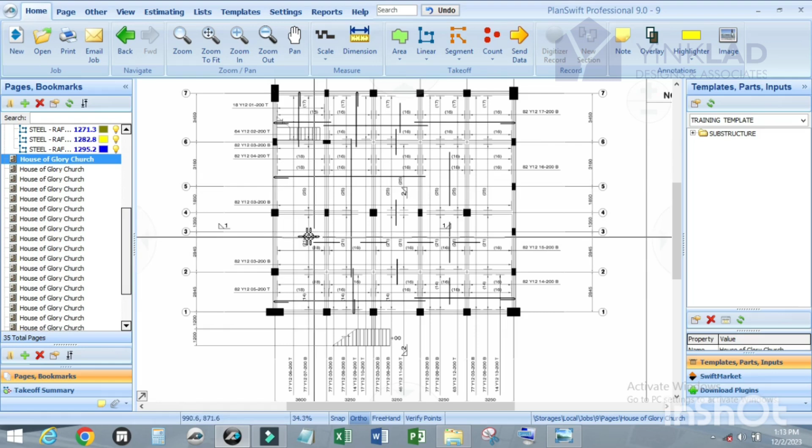Let me show you the section of this. This is ground floor slab details according to this structural drawing, and this is the section. We have full mats at the top, both vertical and horizontal reinforcement bar, and at the bottom you have full reinforcement bar with laps. As you can see, you have laps at the top of the raft beam.

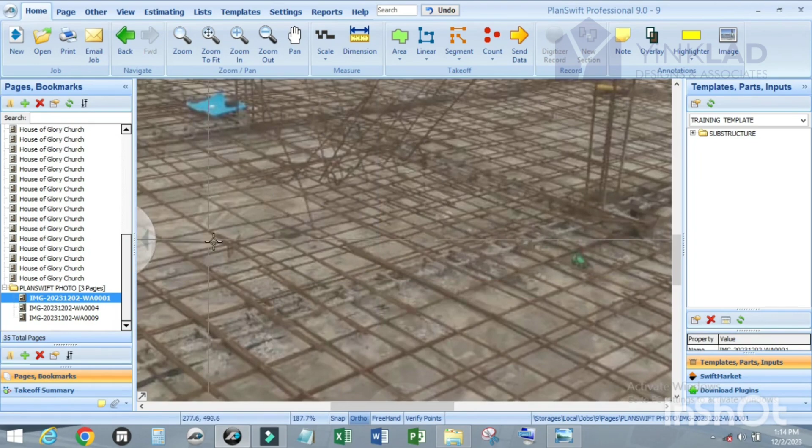So let me show you some pictures. This is raft slab, this is the top. I don't know, maybe you can see it clearly. This is the top reinforcement bar, horizontal and vertical, and this is hose bar.

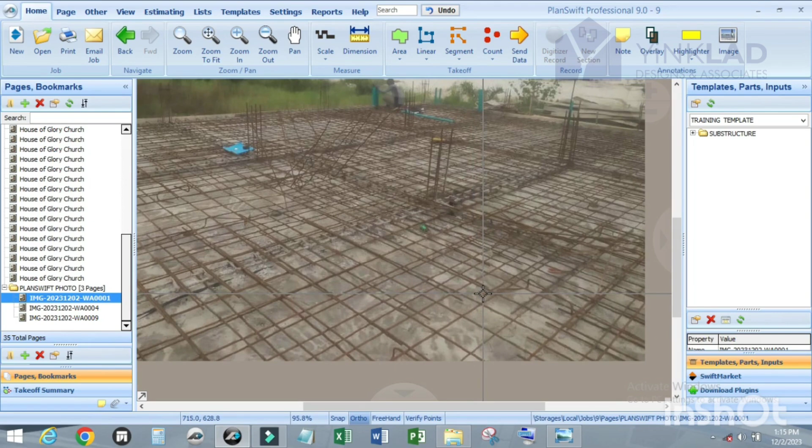The function of this hose bar is to raise the top bar up so that when casting, or when workers are working and moving on the reinforcement bar, it won't press it down. It will maintain a stable position so that the top bar won't press down and break the plumbing or electrical work, so it won't have any effects on anything placed under the reinforcement bar. That is the function of this hose bar.

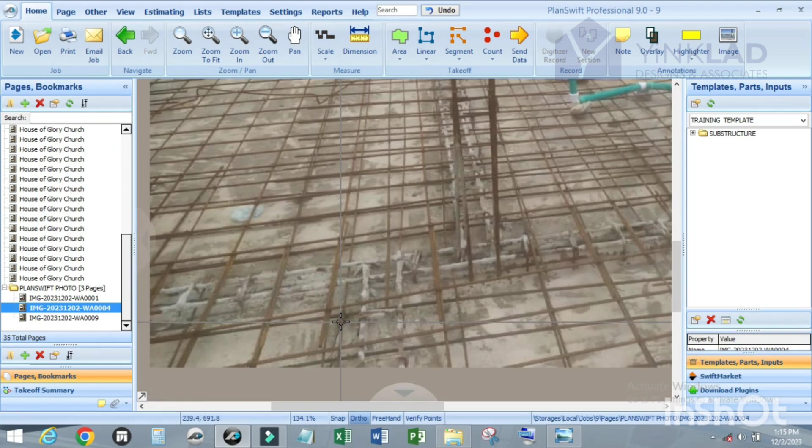We have top and bottom bar. I want to show you something. This is the bottom bar, the one under this reinforcement on top of the raft beam is the bottom bar, and this one that is on the beam is the top bar, and this is the laps. You have laps at both sides.

Same thing applicable to this one. This is the bottom bar, on top of the concrete, and the top bar is on top of the beam. Let me show you another picture.

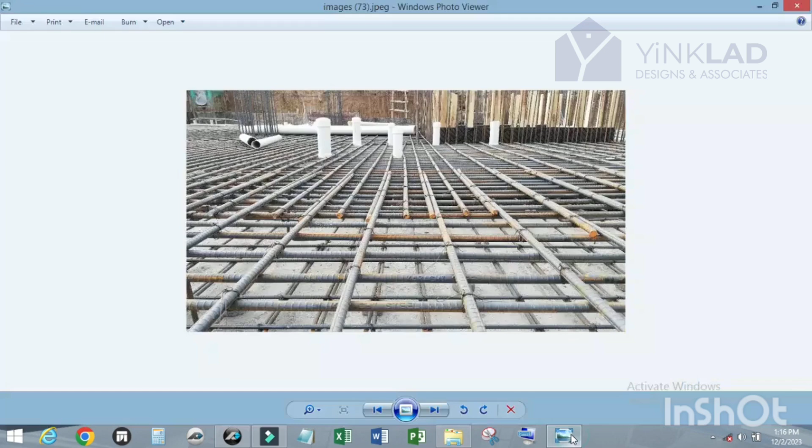This is the reinforcement, and I want to show you the laps. You have two laps, at both sides. So you have reinforcement at the top.

According to this picture, we call this one top, and the one under it we call top bottom. Understand, top bottom. And the one under that, directly on the concrete, we call bottom, that is BB. And the one on top of the bottom bar, we call bottom top, that is BT.

I haven't scaled this page. Oh my god. Let me scale it so that it makes our work fast. I'm very sorry because I haven't scaled it. Let me scale it fast.

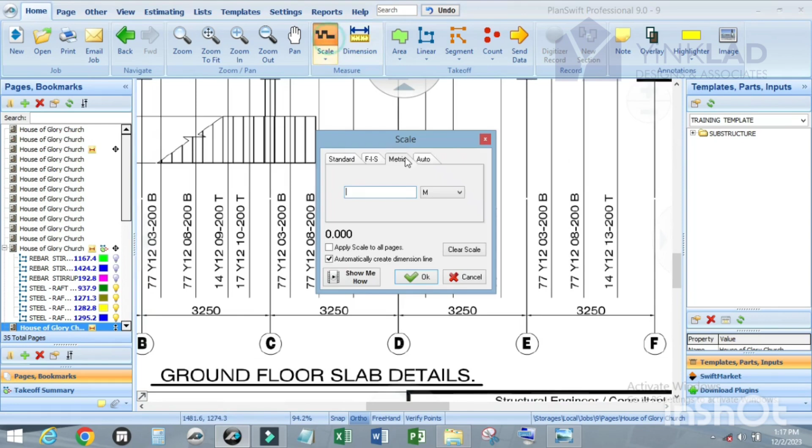Let me confirm it. Okay, yeah, it's correct, it's okay. So good, so let us start with the templates.

Let me first explain some things before we start customizing the templates. This tutorial is based on two aspects: the first one is counting takeoff with counting takeoff tools, and I'm going to make use of the count method and linear method for takeoff.

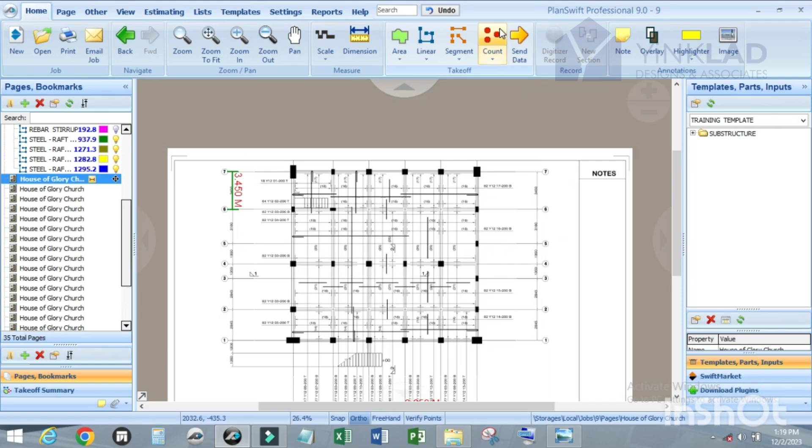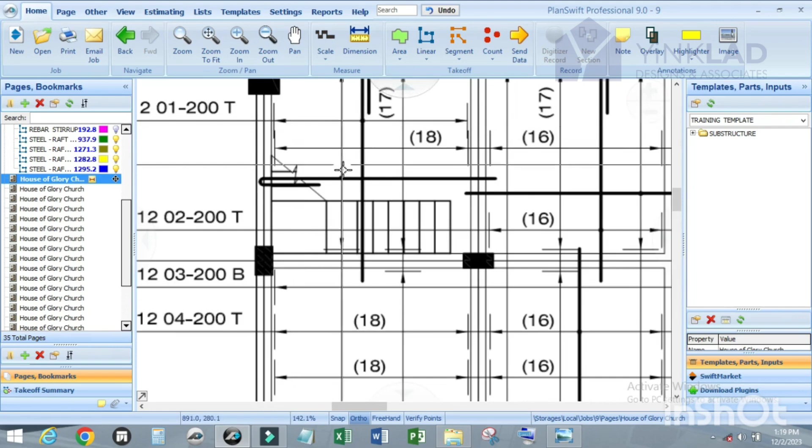So let me explain this. This is T, which means top, it means top bar. It runs like this. Anywhere you see this call out, this dimension from this point to this point, and you see these dots on the reinforcement bar, that means you have to trace this call out to this side or vertically, to determine the details of the drawing.

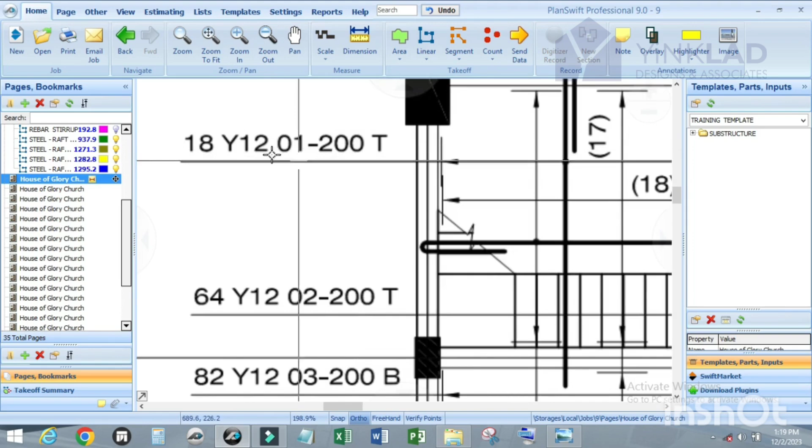So this is 18 numbers of Y12, bar mark 01, and the center to center is 200 mm. Now this reinforcement starts from this point and ends here, as in how it is being distributed, and the reinforcement bar runs from here to this side and bends like this, and bends like this.

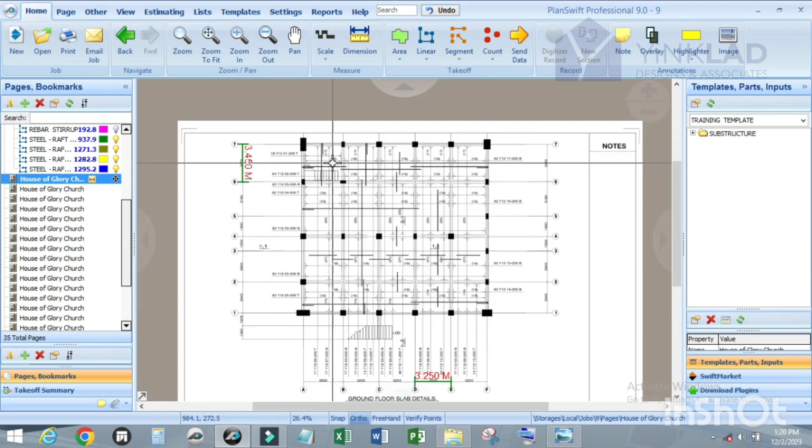Okay, let me now sketch something. This is raft slab, right? So for raft slab, this is how the reinforcement is being placed, something like this. It turns upside down. That is how raft foundation slab is being positioned, is being placed, and now place it like this.

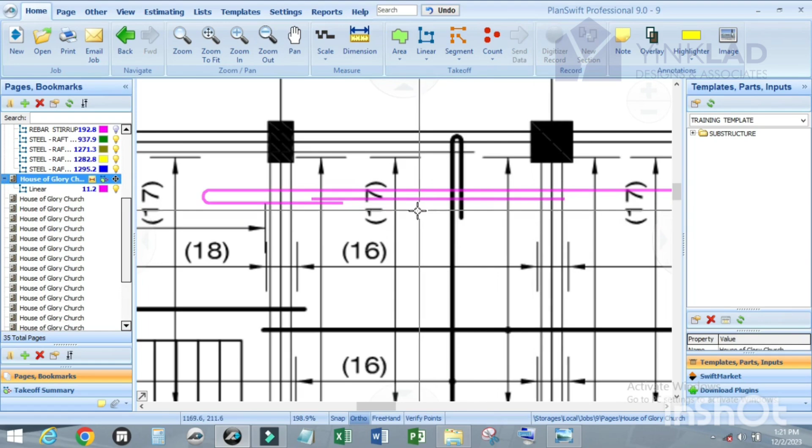Slabs, you understand? But for suspended slab, it's vice versa. Like as it is now, you turn it again upside down. I'm coming, let's bring it like this.

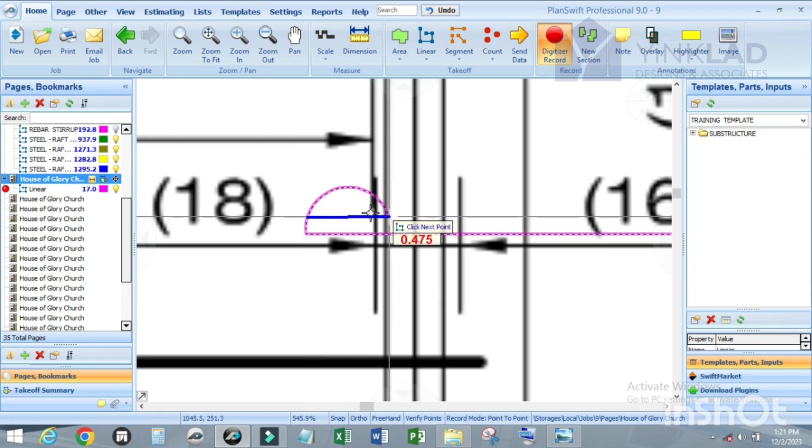You get it? So this one is for raft slab, and this one is for suspended slab. So let me delete it. Yeah. So I've explained this one, right? So let me now explain this one. Let me check this one.

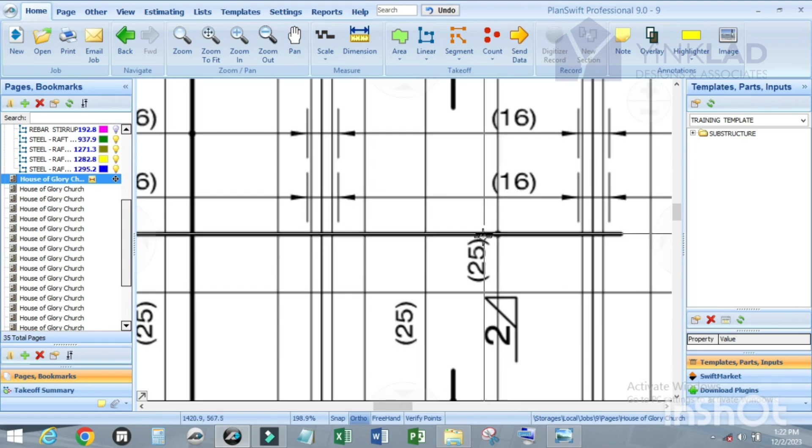Okay, good. For this reinforcement bar, it starts from here and terminates here on this beam. So check this callout, this dot that is on it, and this is how it is being distributed. Let us check it out. It starts from here, it stops here, and it continues from here. This is beam. This is beam. This is raft beam that runs from this point to this point.

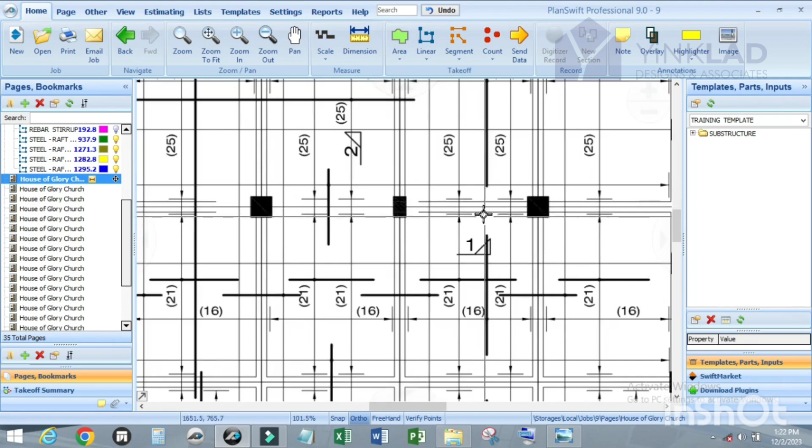So this reinforcement, where am I? Okay, yeah, it continues from here. Anywhere you see any space like this, that means there's a beam here, suspended and raft beam. So it continues, it continues. So it stopped here, it stopped here. You understand? It stopped here, and this line proceeds or extends forward in order to call it out to show the details of it.

So we have 46 numbers of Y12, bar mark 11, and center to center 200 mm. See, that is top bar. So that is how it's being done. So let me explain this one. This one is supposed to be bottom. Yes, this is bottom bar. This bottom bar, pick from this point, stop here, continue from this point, stop here, continue again, stop here, continue again, stop here. That is how it is being distributed.

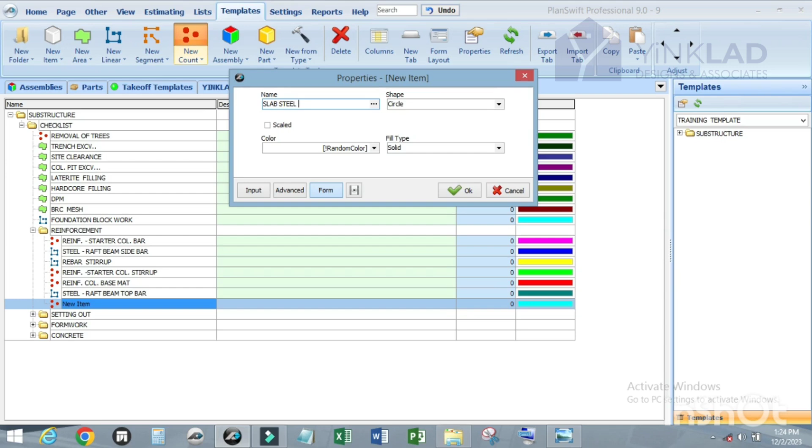So let's get started. Let's go to our template. Let us continue with the previous one we've done. I have to explain it before we start customizing it, you understand? And I've done that. So just click on reinforcement folder. Then just start with count takeoff tools. So let us name it as slab steel bar. Click on advanced. Now it is time to add properties.

Let's first add diameter. Let's add the formula for the diameter, or the size of reinforcement that can come across on the drawing for slab, like 10 mm diameter, 12 mm, and 16 mm based on the drawing. Click OK, and you see now there will be a drop down for you to select anyone you like. So let us proceed. After diameter, you have bar weight.

Bar weight. What is the bar weight of 10 mm? The bar weight of 10 mm is 0.617. Of 12 mm is 0.889. Of 16 mm is 1.579. Yeah, I got it. Sorry for the last tutorial that I mixed it up. So now, after bar weight, you proceed with center to center.

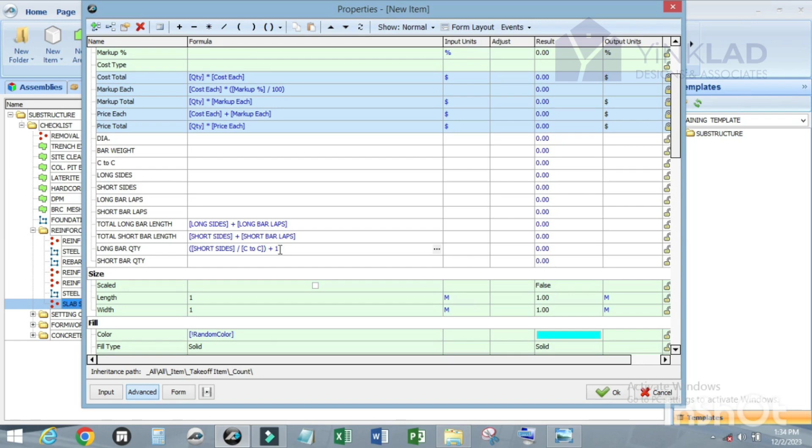Once we get the total quantity by dividing the short side. For example, if the dimension of the short side is 10 meters, and you divide it by your center to center and it gives you 5 numbers, we now add this 1 to it, so that one will take care of off cut. Let me show you on pictures.

Maybe I have it. Okay, I will show you on the drawing. On the drawing itself, there is one vertical reinforcement bar at the side of the slab that is being bent. You understand? The one that you're adding takes care of it and the off cut, and some little additional reinforcement bar that we need. So that is the function of this plus 1.

Let me re-explain again. To determine the long bar quantity, our formula is short side divided by center to center plus 1. You now open a bracket and close the bracket again. Now multiply it with total long bar length. After multiplying by the total long bar length, you can close it under brackets.

And here we have laps at one side, on the same row, just one point, based on the length or width of the floor plan. So for the laps, let us use 0.45, that is 450, multiply by 2, because the lap is at one point, not 2 points. If it is 2 places, that will be multiplied by 2 again. So let us maintain this by 2. The same applies to the short side: 450 multiplied by 2.

Let us input the units. Diameter is in mm, bar weight in kilogram, center to center in meter, long side meter, short side meter, total length meter, long bar quantity, that's the total numbers, and total length, the total quantity of both the long bar and the short bar.

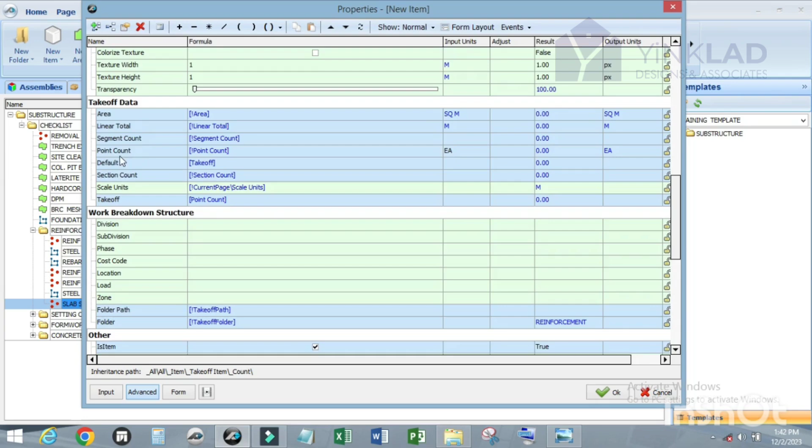So to calculate the general quantity now, start from the long bar quantity plus short bar quantity, then close it with brackets. After closing the bracket, multiply it with point count, because we are using count takeoff tools. Let us check it here for point count. The reason I'm checking it is because sometimes if I move it up, it may delay. That is why I want to check this.

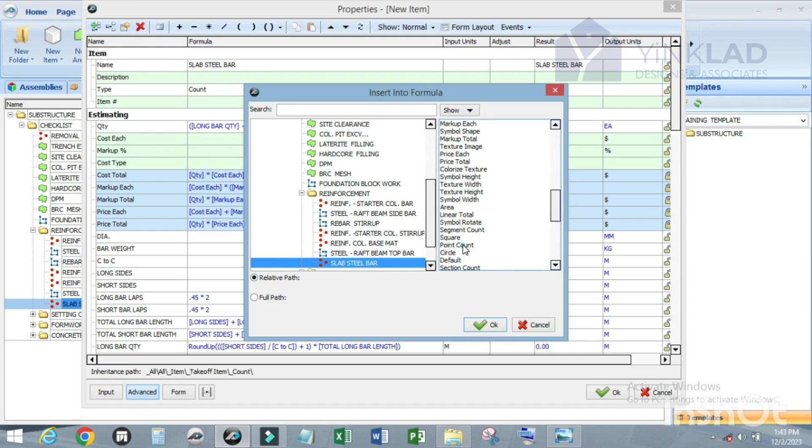But yeah, point count. Okay. After point count, I multiply the bar weight. You can still move the bar weight here. It's very easy for us. Close the bracket again. That's the way we multiply this point count with the total quantity that we get here. We now multiply with the point count, that's why we are closing it. Then multiply it by the bar weight.

Move it here. Oh, I haven't added the multiplication sign. Yeah. Multiply the bar weight. Good. The unit is kg. Good. So we are good to go. So now let us do, sorry, like we always do. Let us uncheck all these things. Don't need it. Don't need all these fields. Don't need it at all. So don't need it. Don't need it.

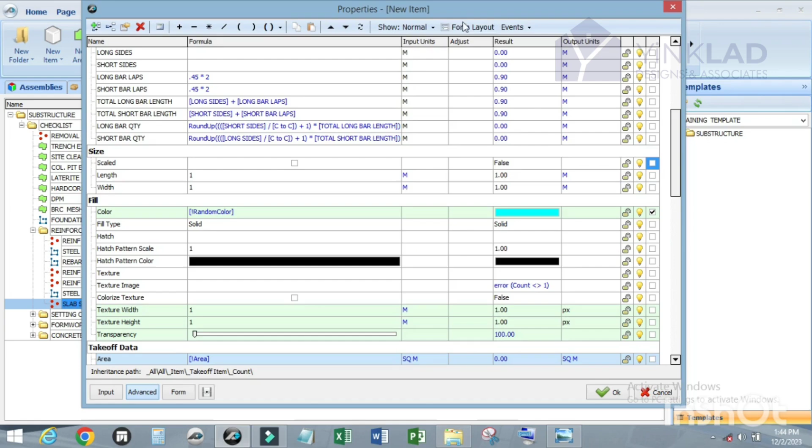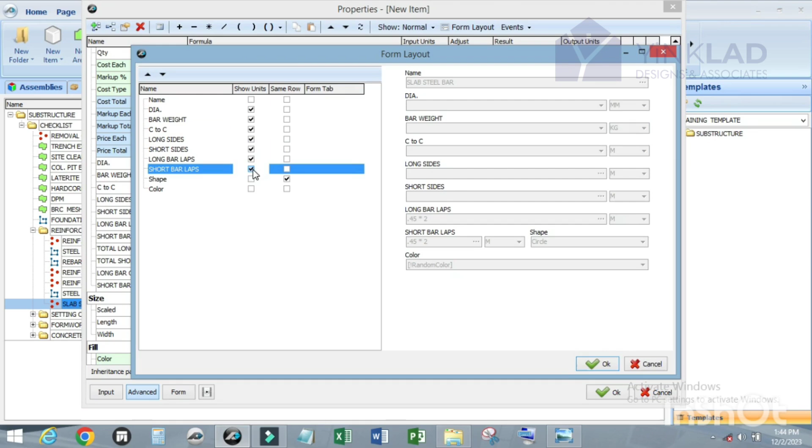Let's come to form. No. Let us check some of the properties that we need. We need diameter, bar weight, center to center, long side, short side, the two laps. Yeah, we need it. That's what we need at the form layout. Let's go into layout. Let us first show all the units. Let's show the unit. Let us move it. Oh no. Yeah, good. Click on OK. So we are done.

We are done with that. Let's click on form. You have diameter, bar weight, center to center, long side, short side, long bar laps, short bar laps. Yeah. Click on OK. Let us first use this to calculate, understand? So it's to calculate first before moving to the second method. Reinforcement. So slab steel bar, right? Okay, let us dimension it first to determine the total length of it.

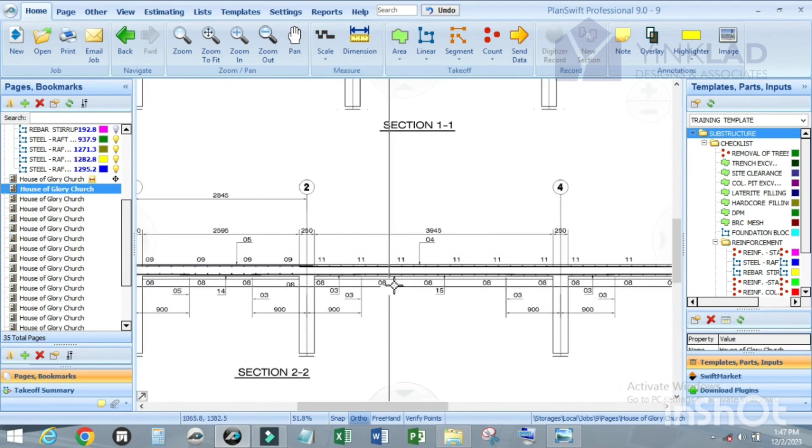Yeah, yeah. Let me move this and move this. Good. So now we first take care of this top bar first. Then after taking care of this top bar, according to the section here, we discover that we have reinforcement bar at the top and the bottom, all through. I believe there's no reinforcement here. We know how to work on that. Understand? But we have reinforcement bar at the top and the bottom. Good. So now just take care of the first.

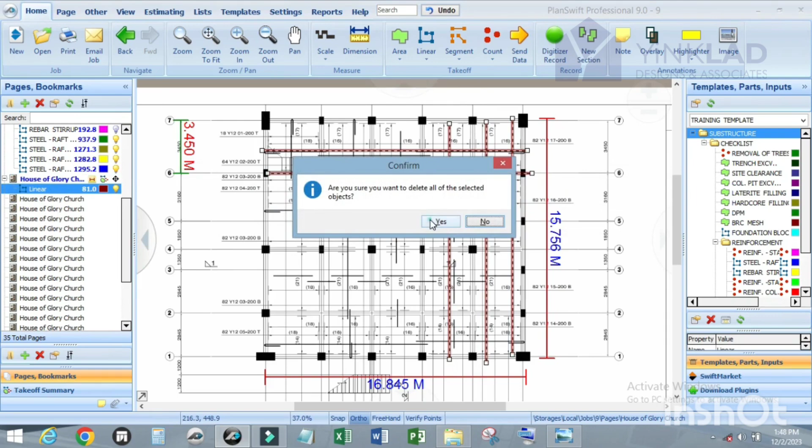Okay, let me first explain something. So we have vertical reinforcement bar and horizontal. Let me explain what I mean by vertical. This is vertical reinforcement. We also have horizontal at the top and bottom. Let me delete it. Good. So now for the top bar, these are the top bar. Actually, this is bar mark 01. For the top bar, it terminates here, and another one continues from this side again.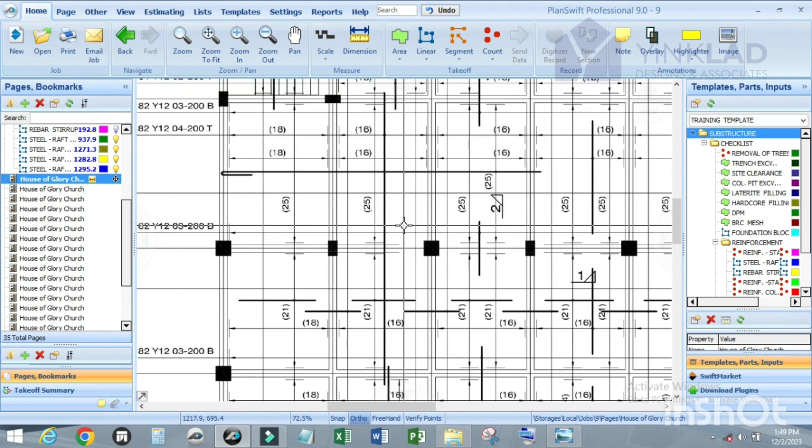Okay, wait. It starts from here and it stops here, right? According to this callout, something like dimension 9 from this point and stops here. And this is the projection to this side. So that is the top bar. Let me check another one. Okay, this is the continuation of this. Can you see this one stops here? Then this is the projection. This one also starts from here, stops here. Excluding this beam, start from here again, stop here until it reaches this side.

So what I'm trying to explain is how to determine the number of lap points. So we have laps here for the top reinforcement bar. You have lap here, you have lap here. That is 2 points for the top bar. You have 2 types of top: top and top bottom. It's not specified, but this one is top. What else?

Yeah, this one is for the vertical top. For the vertical top, you have 2 lap points. Let me check this one out. Maybe top, but I'm not sure. Yeah, it's also top. That shows this is vertical top, this horizontal top. So for the horizontal top, we also have 2 points. Let me check this one. This one is also horizontal top. Yeah, 1. Let me check this one too. It's also top. So here you have 1 point.

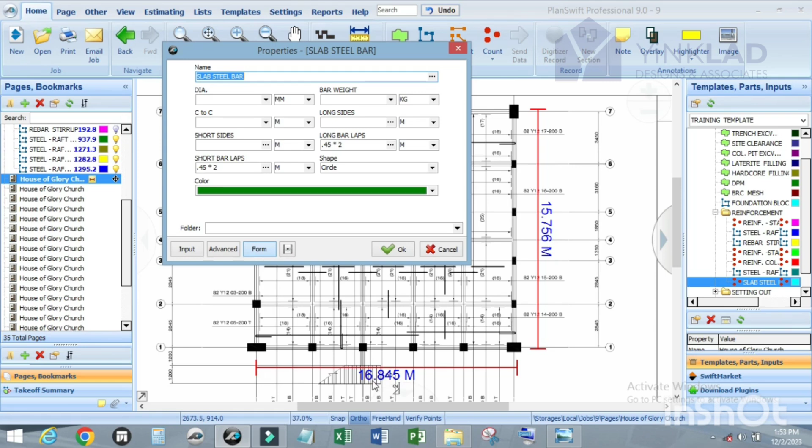Yeah. What is our vertical? The long side. This is 15.7, this is 16.8. So this is the long side. Let's start with this one. And both the vertical and horizontal reinforcement bar, center to center is 200 and bottom is 200 mm, and diameter for the top bar, just name it as T, that is top bar. Diameter is 12 mm, bar weight of 12 mm is 0.889, center to center is 200. What's our long side?

Long side is 16.845. Yeah. What of short side? 15.756. Yeah. So according to what I said, I should make use of 2 point lap. So you multiply by 2. You understand me? Right. You are using 450. Let me check. Maybe you should use 450. Let me cancel it.

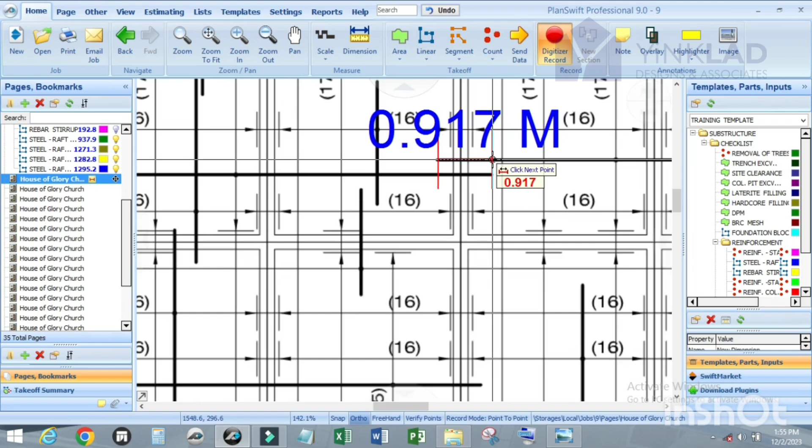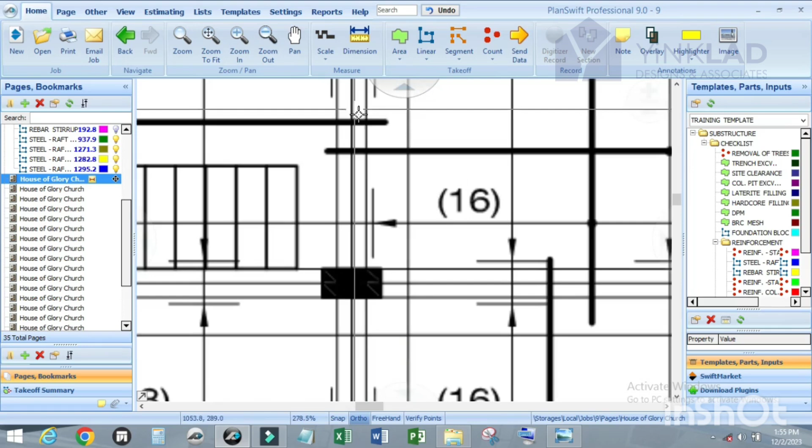No. So I want to confirm. Can you see? It's more than 450. Almost 900. So you have to confirm by yourself, not just assume. Don't assume anything. So we have approximately 700 here. So now, what I'm going to do is let us use averagely 800 as our laps. Understand? Just use 800. Let me check this one too. This one is too short. We have approximately 600 here. So let us use, in short, 800. So it depends on your choice. You can use anyone you like.

So let us rename it as node. This is slab steel bar T. That is for the top there. Diameter, 12 mm, bar weight 0.889, spacing 200, long side we have 16.845, short side we have 15.756. Yeah, we are using 800 as our laps. Okay, multiply by 2. I mean 2 points.

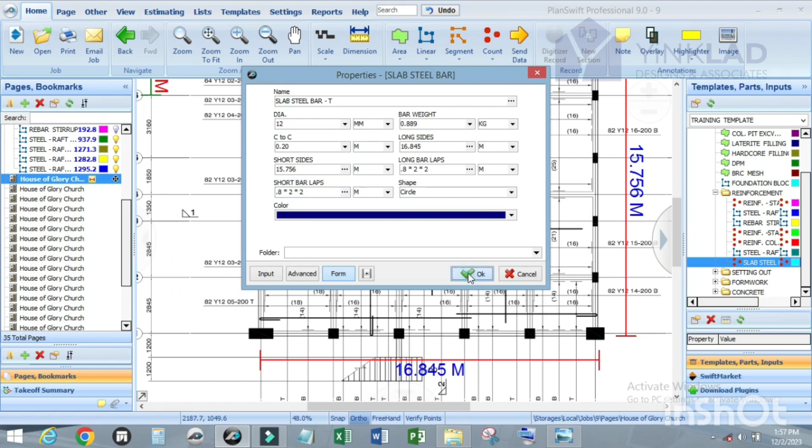This one will serve as two sides, like at one point you have two sides of laps and two sides of laps. Yeah, then these two means 2 points. Let's copy it and paste it again. So we are using circle. Yeah, so now just click it. 1. You understand? That will be 1. That will serve as the top. So click on escape. So wait.

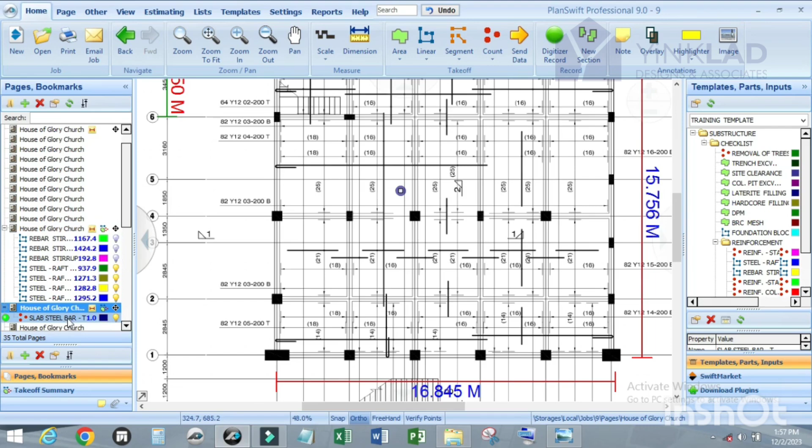There's something I didn't add to it when I was customizing it. So just come down to take off. Yeah, just come down to take off. Just delete it and add quantity to it. Just bring the quantity here, and the unit is kg. Yeah, so now check the legend. Show the legend.

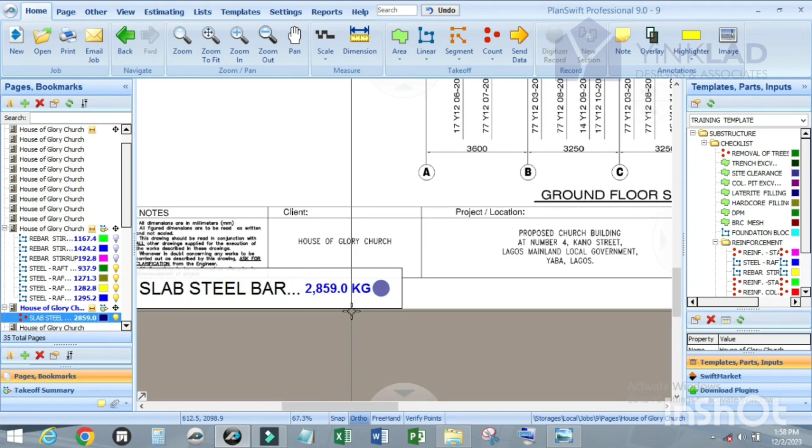So we have 2,859 kg. If I didn't come back to the template to add the quantity, this thing won't show. It shows another thing entirely. So we've done with the top. So what of bottom? The bottom is also 12 mm. Good. And the spacing is 200 mm center to center. Good.

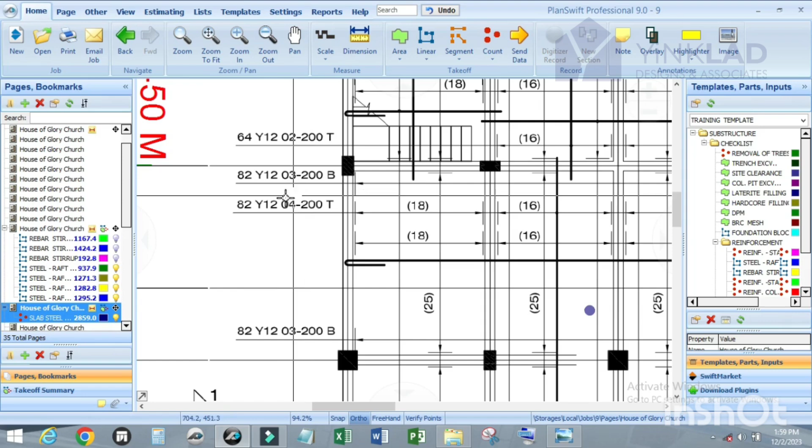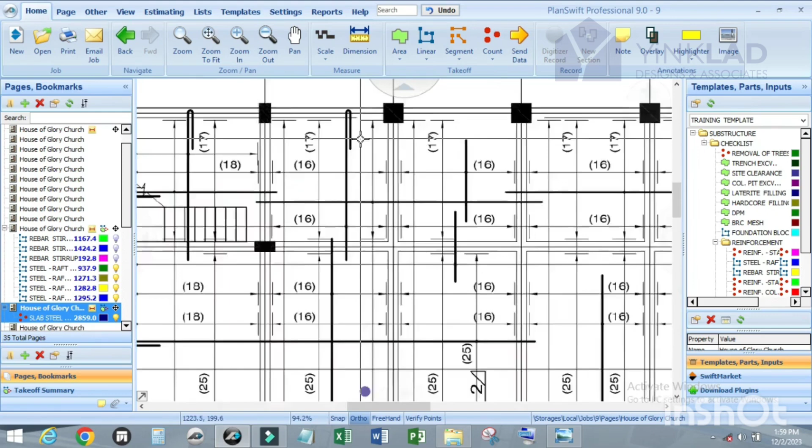Center to center. That's for the bottom. So let us check the bottom height here. The bottom here, vertical bottom. Yeah, start from here, stop here, same thing, go like that to this side. So now start from this point, including the one that bends from the top. You understand me? The bend at the top, you add it to it from this side to this side.

Okay, there'll be a lap between this and this one and this one. There'll be a lap because this one will proceed, it continues like this to this side. Let's check it out. Yes. Okay, this one starts from here. Yeah, this one also starts from here and also starts from here. Yeah, good.

So for the bottom now, yeah, it continues. There's a reinforcement bar that starts from here, terminates here, proceeds from here, terminates here. Okay. It's another continuation. Start from here, stop here, start from here, stop here. This is bottom. Let me show you on section.

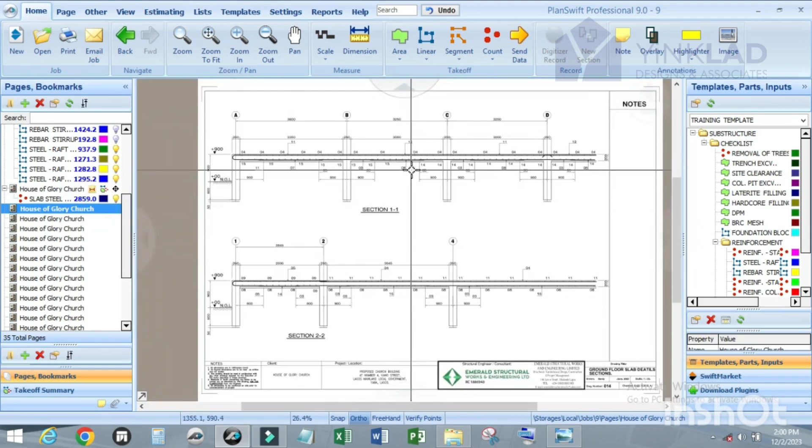This is how it goes. Can you see? Start from here, stop here, continue again, round again, continue again, stop here, continue again, pick from this side, stop here. That is how it's being arranged. So now what I'm going to do is, for the bottom, how many laps do you have?

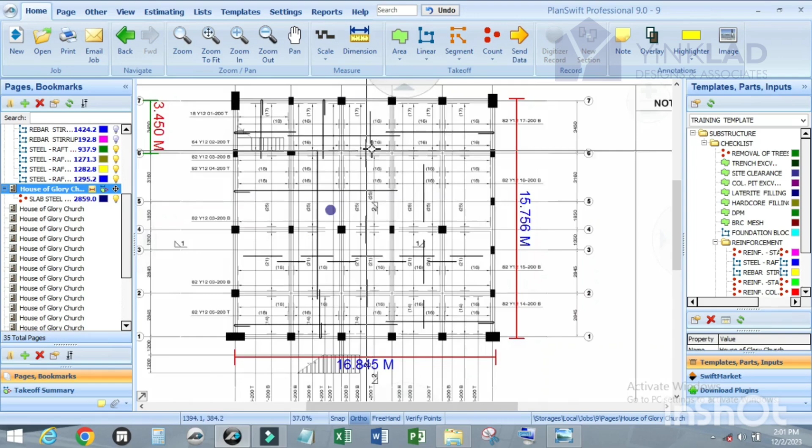You have lap point 1, point 2, point 3. Yes, this and this is 0.3. This and this 0.4. This and this 0.5. This and this 0.6. This and this 0.7. This and this 0.8. Good. For the vertical, out of horizontal. Let me check this one down. It is bottom. Yes, B.

So can you see how it is being separated? All these are bottom bars, and the bottom bar picks from here to this place. Same applicable to this one. Can you see? This one just moves from this and runs here. So same applicable to the vertical and horizontal. So our lap for the vertical is 8, right?

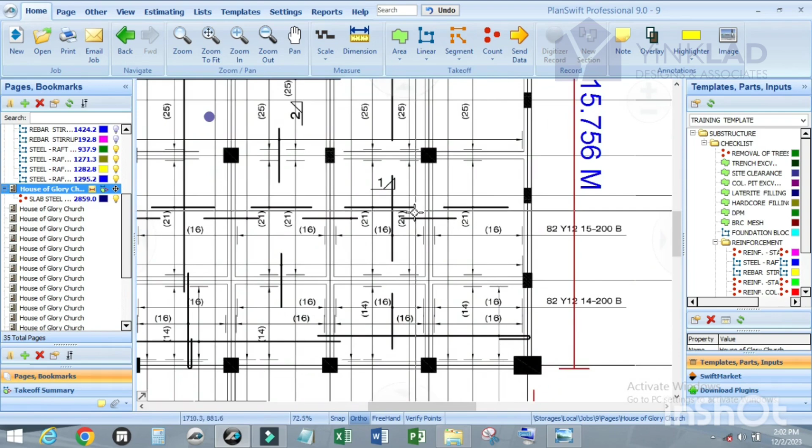Yes. Out of horizontal, lap to lap, this one is 1, 2, 3, 4, 5, 6, 7, 8, 9. With this one and this, that is 10. That is 10. So for this horizontal, let me just check it out. Let me just dimension it and confirm something. Good. You don't have much.

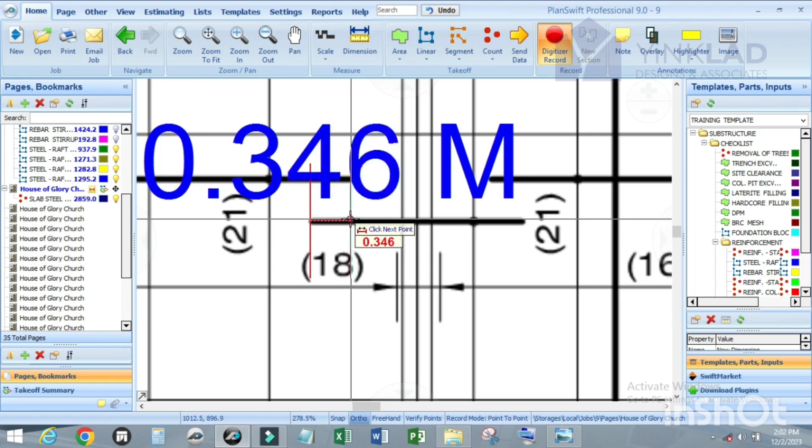Let us use 300 at the lap. It's 10, right? 1, 2, 3, 4, 5, 6, 7, 8, 9, 10. So 10. So it depends on your choice. I'm working according to the structural drawing. You understand me? You may reduce yours to 3 or 4, because on sites sometimes some people don't follow, which is bad. But I follow the structural drawing.

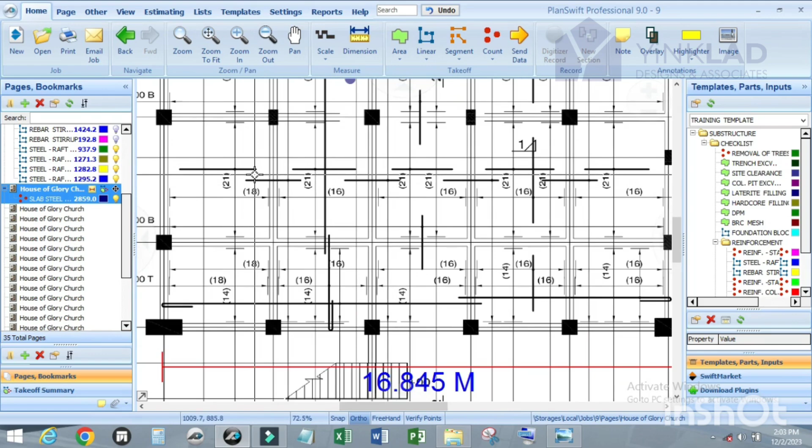And what some contractors try to avoid is that when you are cutting, it will lead to off cuts, like maybe 12 mm, 3 mm off cuts, useless on site. That is why some engineers and contractors on site don't do all these laps. They just pick this one, start it from this point, place it straight. Maybe there'll be a lap here, and then lap somewhere here, not to waste any reinforcement bar by cutting it.

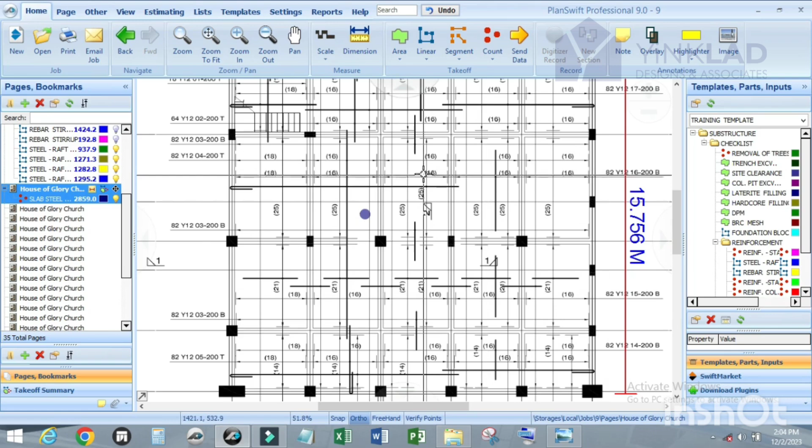You understand? This one is still okay, but you did it for the top bar at 2 points. For this one, 10 and 8, that's a waste of reinforcement bar, and cutting it leads to a lot of off cuts. But according to this drawing, I make use of 10 at the long side and 8 at the short side. It depends on your choice. So now, you're making use of the same area. Click on it. So just add B to it.

So the same thing, you're using 12 mm. This is bar weight of 12 mm. This center to center, same thing applicable to the bottom. 200. The long side, we have 16.845. Out of short side, we have 15.756. So now for the long bar laps, according to this one, you have 10, right? I've said it depends on your choice. You can make use of 2 points.

So what are we using? I said 350, right? Let us use 350 according to our dimension to confirm. You can use 400 depending on your choice. So these two stand for 1 point, lap at both sides. This means 10 points. That is 2 times 10, that is 20. So copy this, paste it here, and change this to 8 for the short side. Let us change the color to blue.

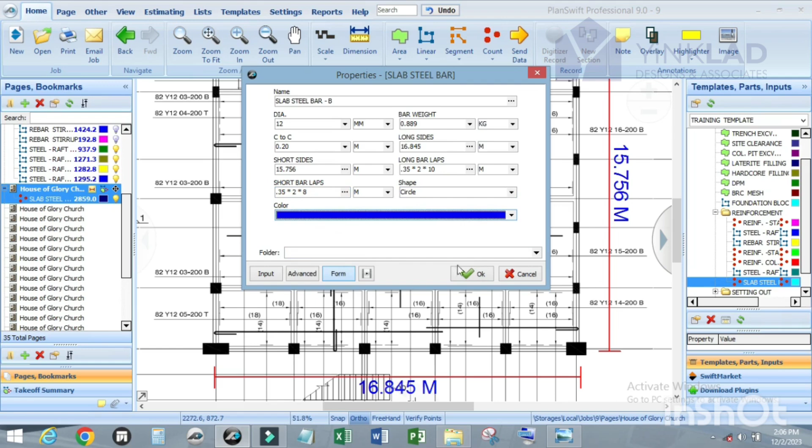Okay, press escape. Let's check the quantity. The mistake I made the other time, I'm very sorry, can you see what I said? Because I didn't change it. So the issue comes from the template that I've done, so I have to adjust it now.

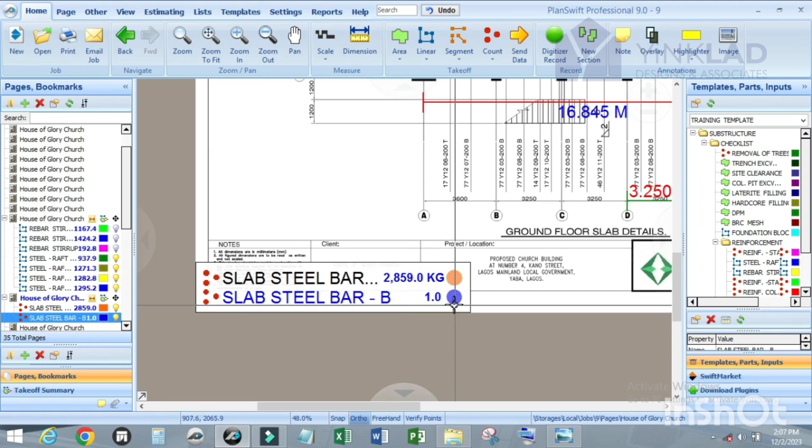Let me delete it so that we'll be on the safer side. Thank God that I haven't changed it on the template, so you're able to see what I'm trying to explain. Without adjusting the template, this is what we're going to get for the point count. So let me delete it. Thank God I haven't changed it on the template. So now let's come back to the template and adjust it right now.

So come down to the takeoff data. Just remove it and just add the quantity to it. By adding the quantity, it shows that you are transferring the information, transferring the information from the quantity, from this quantity you are transferring it to the takeoff, to what is taken off. You understand me? So now let's come down to home.

So let us start over again for the bottom bar. So you are good to go, you are okay with this one right now. So now for the bottom, yeah this one is the bottom. So diameter for this is 12 mm according to the structural drawing.

Bar weight of 12 mm is 0.89. Center to center 200. On the long side you have 16.845, right? Yeah. Short side we have 15.756. Yeah, we used 350, right? That time 350, yeah, 350.

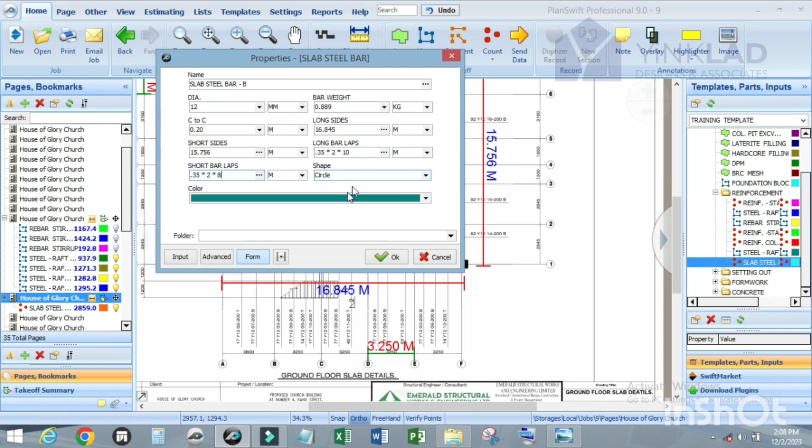Multiply by 10, that is 10 points for the long side here. For the short side, let us copy it, paste it here, and change the points to 8 for the short side. So the color, you can maintain this color, just click on it and press escape.

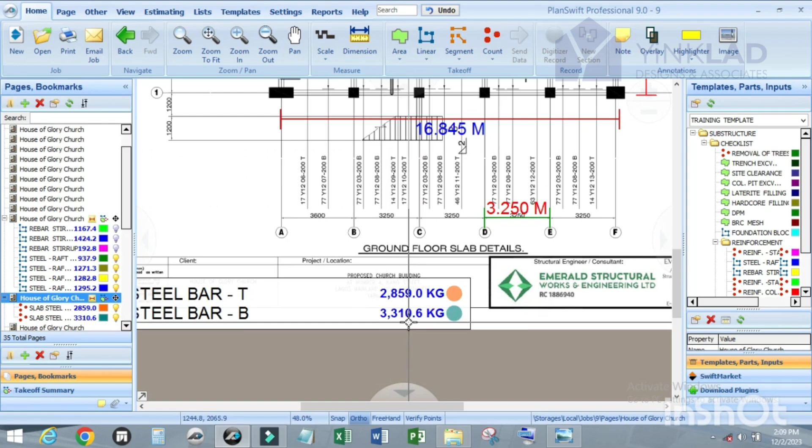Can you see? Can you see now? So the reason why the quantity of the bottom bar increases is because of these laps. Had it been you use the same 2-point laps, we'd achieve the same quantity as we got on the top bar. So the reason why this one increases is because of the lapse. You understand? Because of the lapse, that's the difference.

So now we are done with the first method on how to calculate for slab steel bar. Secondly, is by linear method. So let's proceed, let's come down to templates, click on linear.

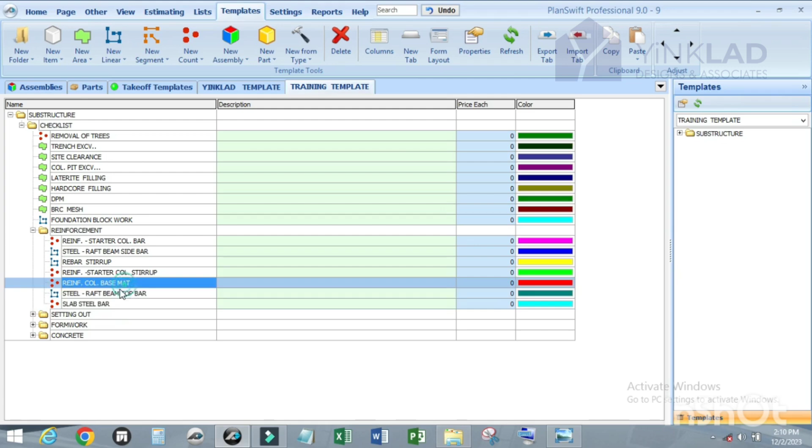Let us cancel it, just copy this one. Not to waste your time, copy it, click on linear, just paste it. The same name, click on advanced. So we don't need budget property.

Just need there as diameter, 10 mm, 12 mm, 16 mm is okay. Just check, just do it once. No wasting of time, no wasting of time now.

Yeah, so after diameter, bar weight, yeah it's bar weight of 10 mm, that is 0.617 approximately. 12 mm, 0.889, yeah. 16 mm, 1.579 approximately. Yeah, good. What is the units? Kg.

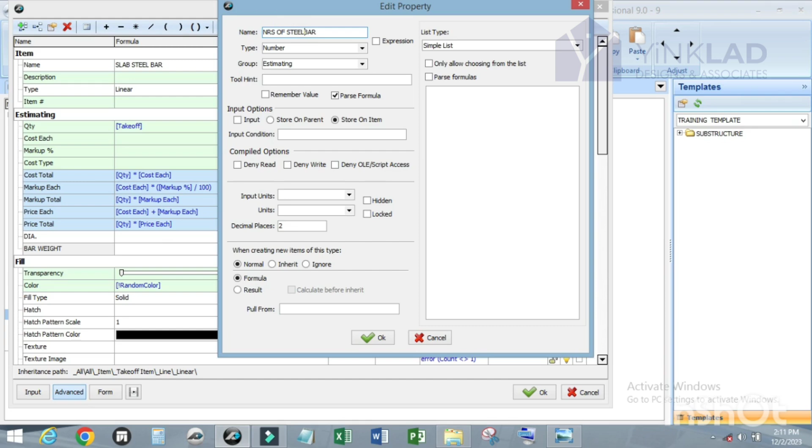After bar weight, we have number of bars according to what I said at the first method. So we are going to make use of it. Number of bars. Let's use T bar. Number of steel bar, that is B number.

Yeah, so now let's come down to form, let's show the units. Yeah, so we can bring it bottom of this, I mean the same row. Click on OK.

Let us activate the quantity, firstly the units in kg. So now to activate the quantity, that will be linear total because you are using... let me just check it out here, not to waste our time. Linear total, because sometimes we are dragging it, very difficult. Linear total, yeah, linear total.

Click on OK. Linear total multiply with number of bars, sorry, multiply with number of bar, multiply, just round it up. Yeah, multiply with bar weight.

You can also move this one, you can move all this, move it up, not to waste our time. That is why I don't even move it. You can move these three up, be on it on the same side. So now click confirm, we are done with this one.

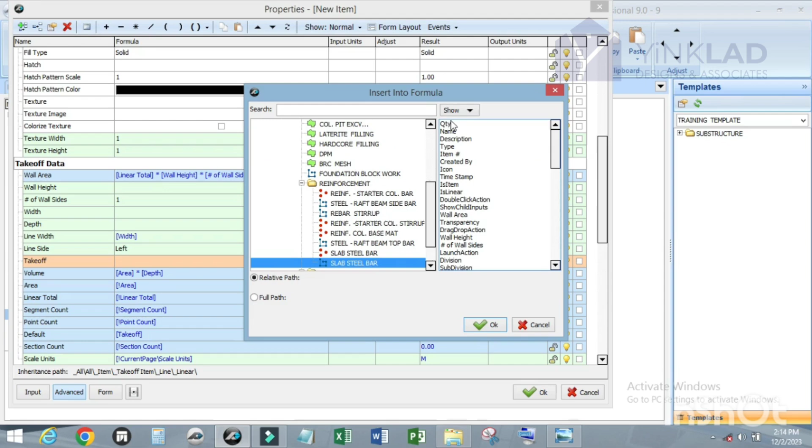Yeah, just remove it and input the quantity. I think I made a mistake again, but I won't make any mistake this time. So now it's good, click confirm. Good to go now.

Let me check it - diameter, bar width, numbers. Okay, let's come down to home.

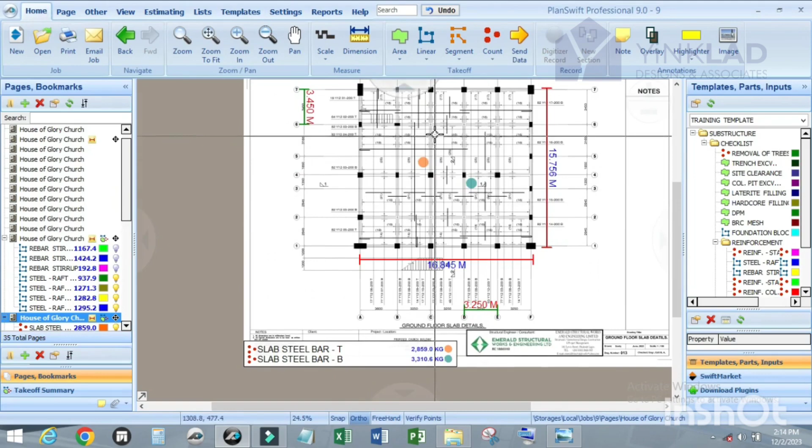This one I won't talk about all reinforcement bar because it will take a lot of time. The first one is the fastest way, you understand me? But this one will take a lot of time, but if you wish to make use of this one it will be better. So now let's get started.

For bar mark, it's easy. You can start taking off from the bar mark number, starting from 1, 2, 3, 4, and so on. So this bar mark, this reinforcement bar, starts from here to here to here, and the length is picked from here and stops here. So now let's get started.

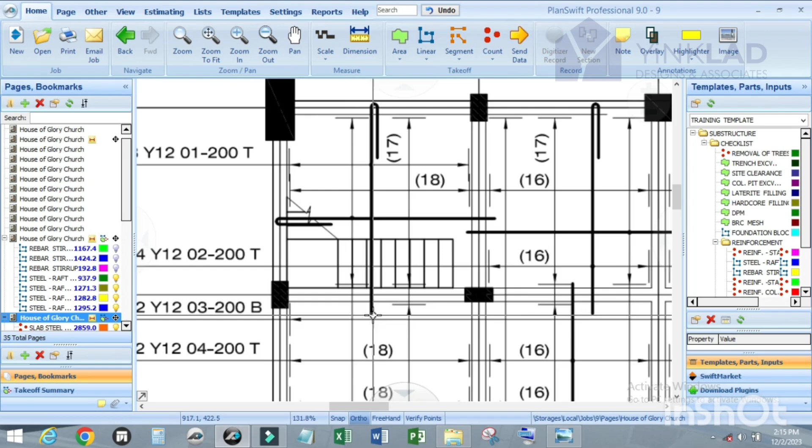Click on this. What is the bar mark? That is Y12. Don't need to add any bar mark, just fix the size of the reinforcement bar as Y12.

You understand me? Y12. So I have to adjust the first one we did - I didn't add the diameter of the reinforcement bar. It's very important, I have to add it.

So numbers, good. How many numbers do you have here? You have 18 numbers. Yeah, good to go, click OK.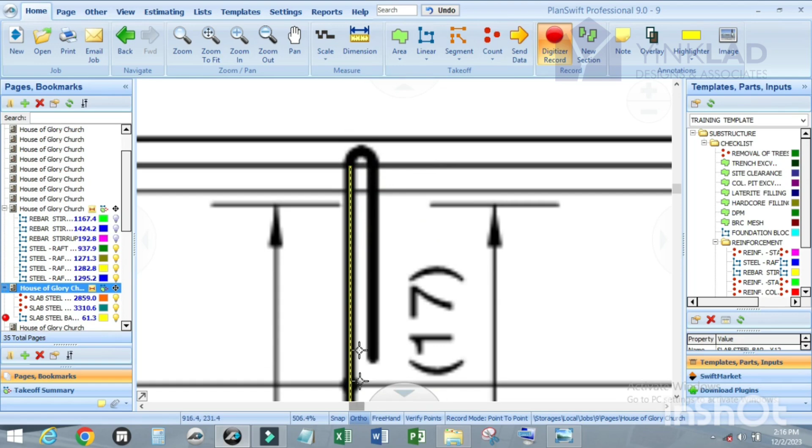Make sure that this record mode is at point to point. Just pick it. Click on this, click on A. Make sure that it is not on auto. Click on F8 to check it. Let's click the opposite side.

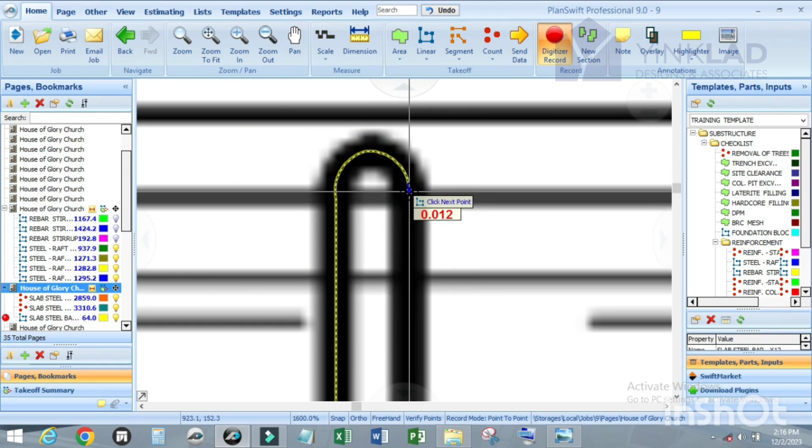Okay, Alt Z. Oh sorry, click on A again. Yeah, click on F8, make it straight.

Click on escape. What do you get? What do you get? Let me check - for this one only, you have 80 kg. So now let me just adjust this one.

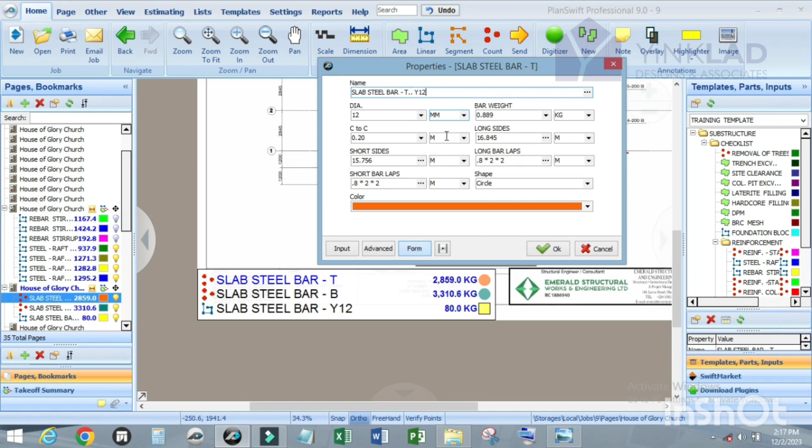Just add 2 dots, Y12. Understand? That's all, I just want to add to it. That is Y12, this one I'll give to this one. Just add 2 dots Y12. So that means that you are working on Y12 for the first method that we did. So we are done with this one.

Let me check another one that is more complex than this, as it takes a lot of time. Like, okay, let me take this one out. So for this one, let me check.

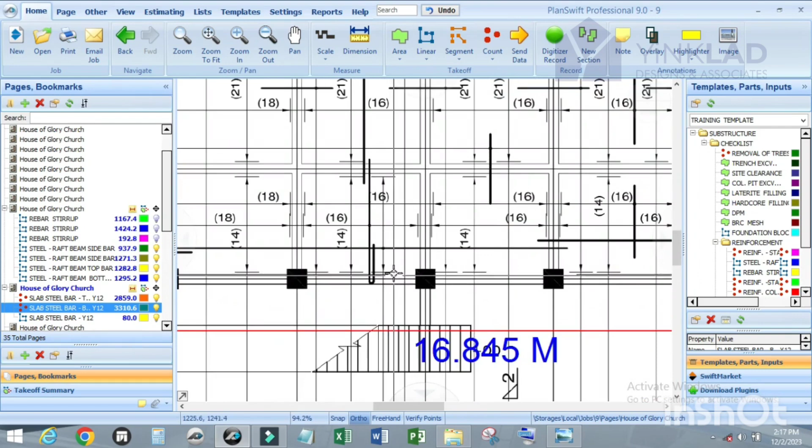Okay, anyhow, so now let me just take this one, let me take this horizontal one. Okay sorry, according to what I said you'll be working according to the bar mark. Okay, this is bar mark 02, just check the bar mark 02.

The color comes like this. Okay, this is bar mark 02. The bar mark 02 is the top bar, so you don't need to add maybe top or bottom.

Just fix the reinforcement, the size or the diameter. You don't need anything top or bottom here, you understand? So if you like, I'll fix it, but for me I don't need that one. So now bar mark 02, this is bar mark 02 now.

So now, is bar mark 02, good. That is also Y12, it's also 12 mm diameter.

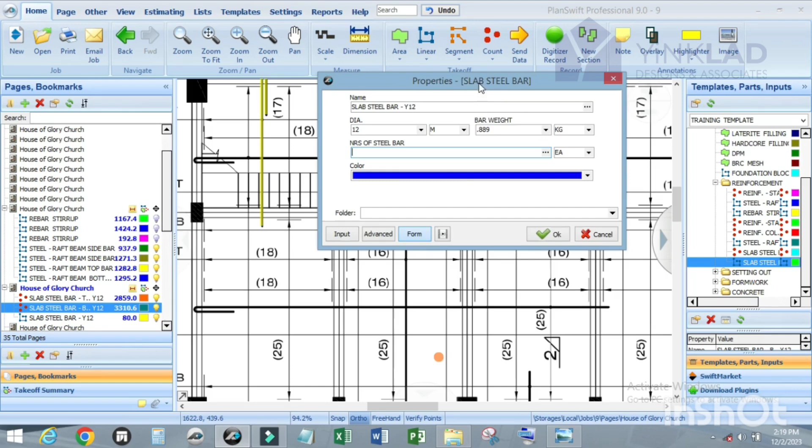What is the number? My God, I need to use 2. I didn't check it before I started working on it. I didn't check it. I'm not sure this is bar mark 2. Yes, it's bar mark 2, yeah.

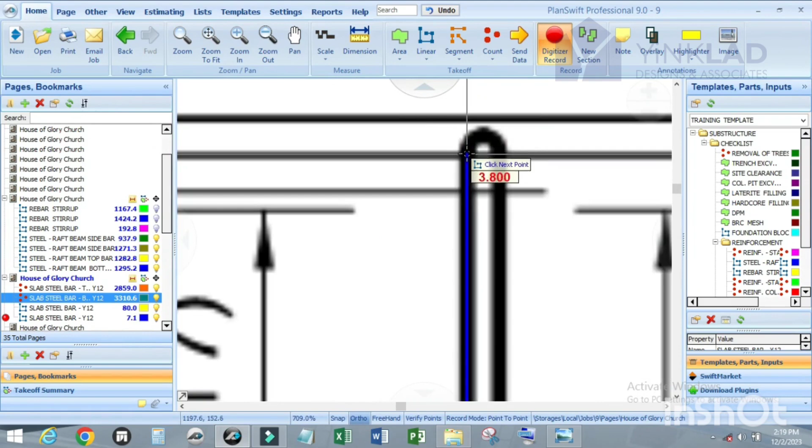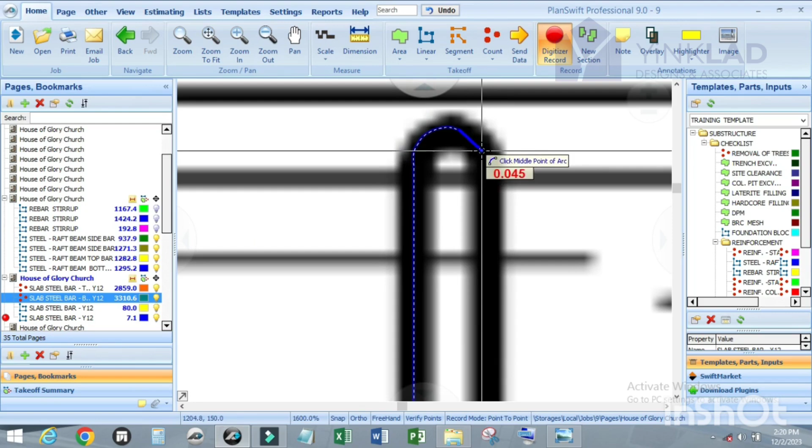Click on A, click on A again. Yeah, I said this one is more stressful. Yes, control, click on F8 so that's A. F8. A. And Z. A. F, F8.

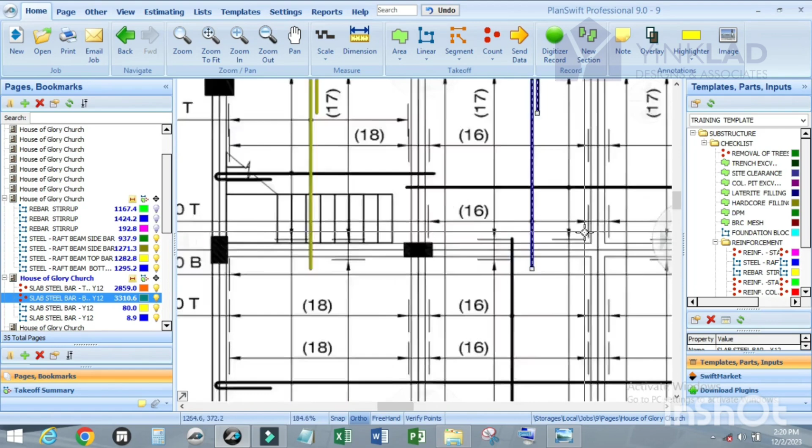So now, how many numbers of it? How many numbers of this one do you have? So I'm going to do - you have 64, so let us edit it. So 64 numbers of it. What is the quantity?

That is 281.8 kg. So in order not to waste our time, let's just jump or move to this one. Yeah, this one is bar mark 13. No, yeah, this is 13. Yeah, we have 14 numbers of it. It's also 12 mm.

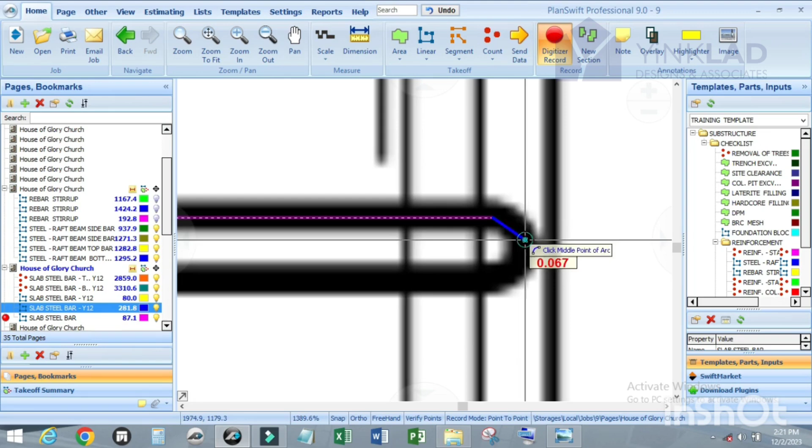Putting numbers of it. Stop here. F8. A. And A again. F8, make it straight. Escape. So let's just check the quantity.

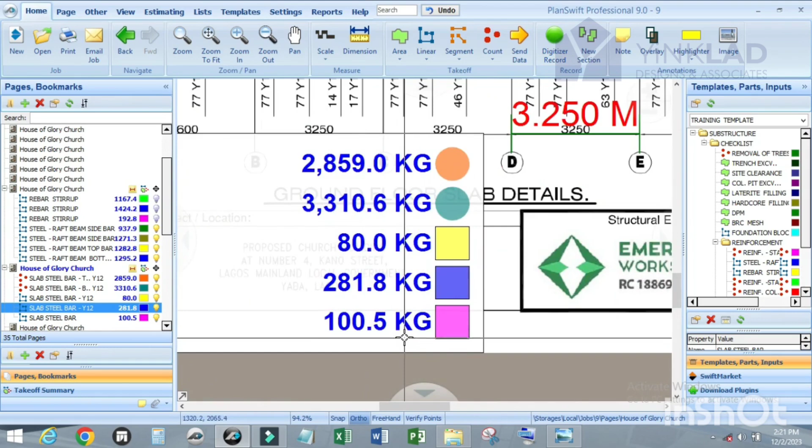You have 100.5 kg. So now this is how to customize and take off for slab steel bar or reinforcement bar.